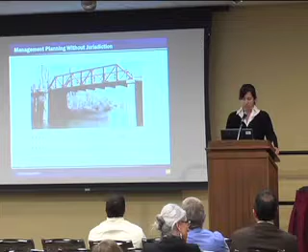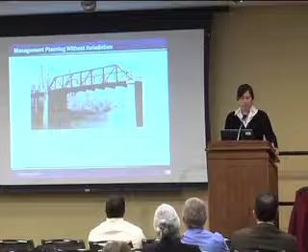As we go through this presentation, particularly the first part, we'll cover an overview of this initiative for locally owned bridges. Then we're going to go over a case study, which is actually the impetus for this project—it's CR 402 at the Navasota River in Limestone County. Throughout this presentation, we'll be talking about the challenges presented by trying to create this initiative.

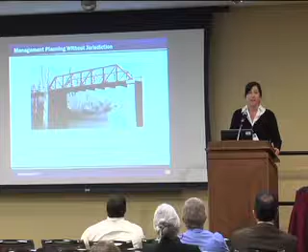So why is TxDOT doing this? Well, because they love historic truss bridges, right? No. Actually, this is real graffiti from a bridge—I promise I didn't do it—in Wilbarger County in the Wichita Falls district, on a bridge we worked on earlier this year.

TxDOT's doing this for a couple of different reasons. One is that counties have said they're not really sure what to do with these bridges after they've been rehabilitated—how do we elongate the lives of these bridges? You give us a lovely rehabilitated bridge, and we don't know what to do with it in terms of maintenance and care. Also, it's a nationally recognized best practice—states all over the country are doing this, and TxDOT is doing it with its own historic truss bridges. So with that experience, they thought, let's go ahead and see what we can bring to the table to local bridge owners who may not have an army of bridge engineers or someone like Jamie or her colleagues in the bridge division who can give insight on what to do for historic truss bridges.

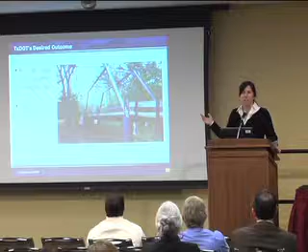Here's an example: this is the Piano Bridge in Fayette County. It was built in 1885 and rehabbed in 2012. This bridge goes back to Fayette County, and they don't have a handbook or manual, if you will, of how to take care of it now. Several hundred thousand dollars were spent on this rehabilitation, so in order to help elongate the life of this bridge, we're hoping to provide long-term management tools they can use and promote proactive planning. This is completely voluntary—bridge owners can decide to use it or not. It's a tool kit, if you will, that they can pick up and use or let sit on the shelf. It's completely up to them.

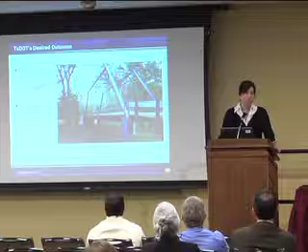Some of the initial challenges we realized is we're dealing with varying levels of experience among maintenance crews—they are by and large the folks taking care of these bridges. Here's an example of a bridge no longer standing in Young County, where someone put a pin in the bridge that's too small. It's a typical thing we see quite a lot on truss bridges—you might have some maintenance crews who know exactly what to do, and some that don't know at all what to do with wrought iron or steel truss bridges and how to take care of them.

Another issue is varied interest of the bridge owners. You may have one administration of county commissioners who's very interested in keeping a historic bridge in good working condition, elongating its life after it's been rehabilitated. And then you may have the next administration who's not interested at all.

And the third issue is creating a usable document. We were told that we had to use a document that didn't have a lot of technical terms. If you've ever seen a historic bridge management plan, they're about this thick, full of technical terms and engineering jargon. We talked about how we can hand this to counties who don't have an engineer on staff.

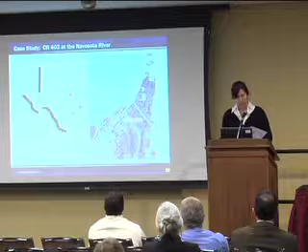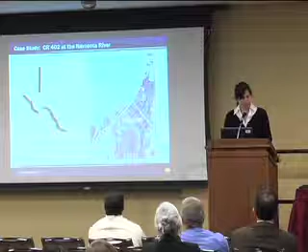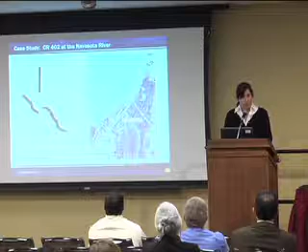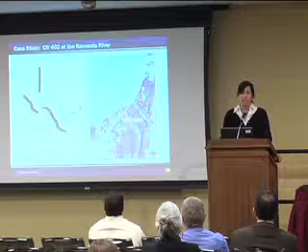So what started all of this was the CR 402 project at the Navasota River. This bridge is in need of rehabilitation. It's in Limestone County, which has an engineer, which is rare for a rural county. They also have about 7 or 8 historic truss bridges, so this is a pretty good test case for this kind of initiative.

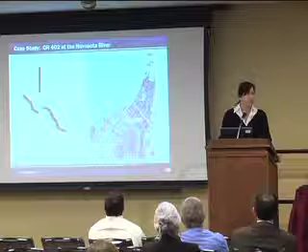The engineer in Limestone County is very interested in what we're doing. He's very engaging and active in this project. And the big thing as well is that this county wants to rehabilitate the bridge.

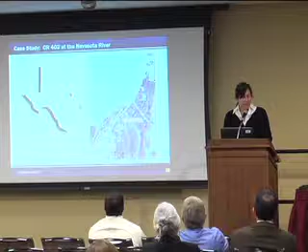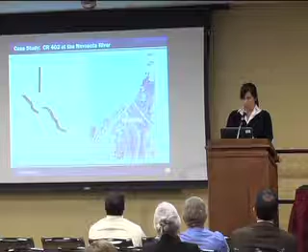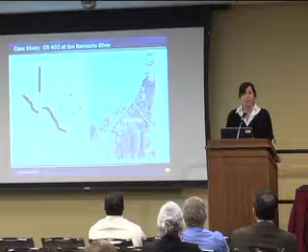The public is behind the project as well. I think a very big reason is that Fort Parker State Park is located directly adjacent to the bridge, and there's a state highway located just southeast of the bridge. So the bypass for this bridge is really short, less than half a mile.

Just to give you some understanding of where it is, just north of the bridge is a walking trail, and just south of the bridge is a parking lot with a walking trail. So it does have potential for one day coming out of vehicular service if the county desires. We're keeping that in mind too with the historic bridge management plans we're doing.

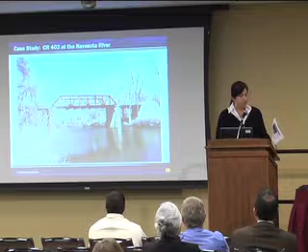A little bit of information about the bridge is that it's a Warren pony with verticals, built in 1920. It's one of the only surviving Warren pony trusses built with a Texas Highway Department standard plan. This bridge has a concrete deck built originally with the bridge, which is a little different for pony truss bridges, so it presents a couple of unique things.

It's got a pretty stout concrete substructure, as you can see the pier in the water there. Something I didn't point out on the last slide is that there's a dam about 725 feet upstream of this bridge, so its substructure, channel, and banks are in great condition. It's a good candidate for long-term preservation.

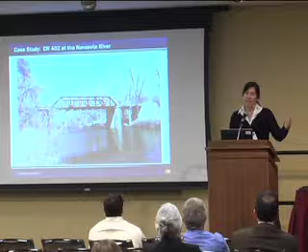Something else that's very weird when we got out and looked at this bridge is that there are electrical outlets on it. The truss has an electrical outlet, and the south approach has one too. We're told that the locals will close the bridge and have concerts and other events on it. They also put Christmas lights on the bridge. So it's definitely a well-loved bridge and a good project to start with.

Some things just to note about the condition.

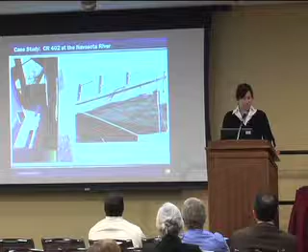We have a lot of section loss on the bridge, and according to the structural analysis performed on the bridge, there's around an 80% section loss on some members. We're looking at 20 to 50% section loss on the gusset plates.

The bridge has a lot of pack rust, lots of rusting on the riveted connections, and this is a field bolted and shop riveted bridge. So it was assembled in a shop with rivets and then field bolted in parts at the site. So the rivets are, of course, some of the most important structural elements of the bridge.

So we also have some issues with the approach spans. There are 9 approach spans on this bridge, and they're not in the greatest shape. You can see some pretty severe spalling here in this picture, and then we have a lot of damage on the railing on those approach spans as well. This is actually fairly typical of what the approach spans look like on this bridge. It's only one lane, so people keep hitting the railing on the approach spans.

Surprisingly, the truss is in great shape. It has very little impact damage. So it looks like the approach spans are taking most of the brunt.

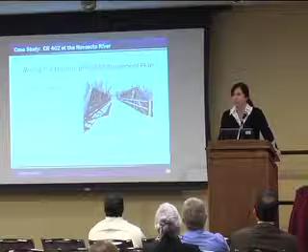So when we've been working on this, we had some initial meetings. My client is the Environmental Affairs Division, the Historical Studies branch. We've been working very closely with the Bridge Division in creating this management plan and some of the information that's coming out of it.

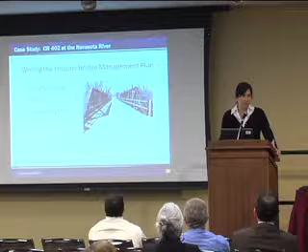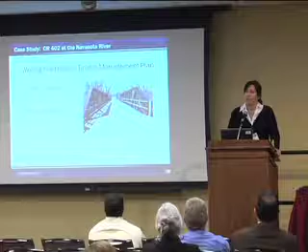And of course, we've been working with the Waco District. Their staff has been great. The bridge engineer in the Waco District went out to the bridge with us, in addition to us going out with the Bridge Division, our staff, Environmental Affairs staff.

And then what we did was we created a preliminary report. And when we did this, we realized that we had to shorten it. It was way too long. And we had to make it more reader-friendly. We didn't think that we could hand a book to a maintenance crew and say, 'Here you go, here's your guide.' So we had to come back to the fact that we couldn't use technical terms.

Again, extremely difficult to try to give some kind of guidance on how to take care of a bridge without using technical terms. So what we decided to do was, actually what we probably needed more than anything was some toolkits in the appendices. And those were going to be standalone reference guides that they could use. They could detach them from the document and take them out in the field with them.

We've created a visual glossary so they know what a gusset plate is, or so they know what a turnbuckle is. Things that they may already know, but some people may not. So we put some of that information in there.

And we thought if we have these appendices, this could have broader application beyond the CR 402 bridge. Any bridge owner can actually take this information and apply it to their bridge because we made it universal enough that we could do that.